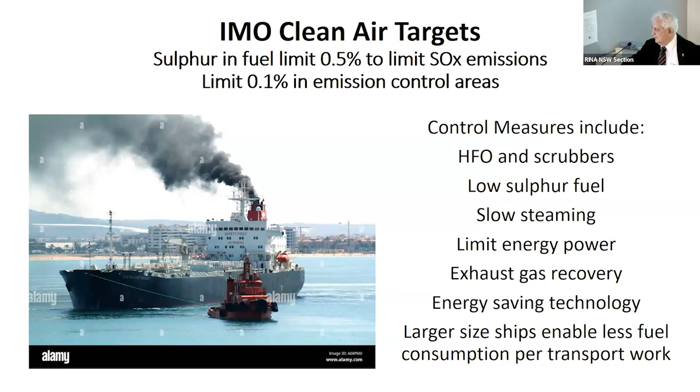They're looking at hydrogen power and clean air. That's been in for a few years, and here we are with the greenhouse strategy. IMO, following the Paris Treaty, 1.5 degrees compared to pre-industrial levels. The clean energy IMO carbon intensity is to reduce carbon by 40% by 2030, 70% by 2050 compared to 2008.

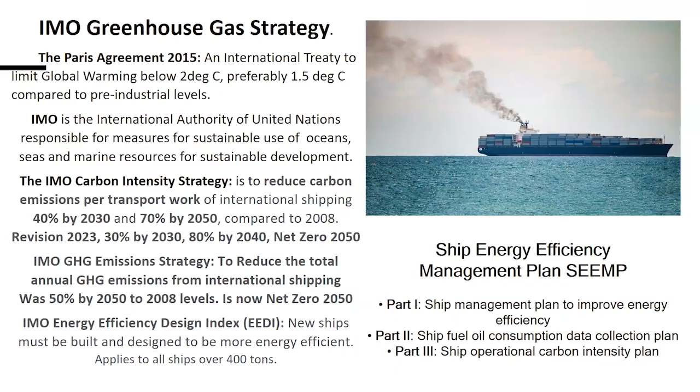And the revision this year, only this month or last month, 30% by 2030, 80% by 2040, and 0 at 2050. That's put a lot of pressure on the industry. So then new ships need to have a design index and an energy efficiency plan and a measurement plan. That's the diagram. It shows fuel oil collection system, CO2 intensity indicator, and then the operational carbon intensity plan, which has to be certified by a surveyor

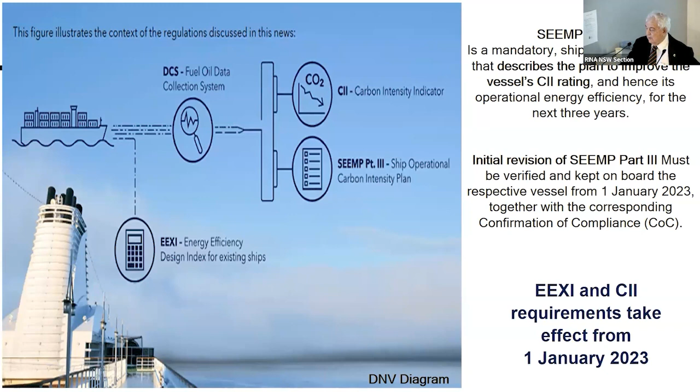and submitted to IMO, and the ships will get a rating next year from A to E. A is the best, E is the worst, and they'll have to put plans in to make sure they meet the next target within 3 years. So there we go. In terms of ships over 5,000 gross tons, CO2 per deadweight ton for bulk ships, per passenger for cruise ships, passenger ships, and per container for container ships. So there's a control center, one of the ship management companies in India.

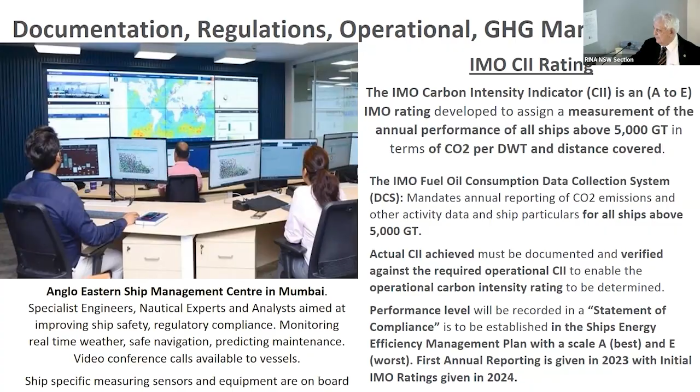And we get on to the energy saving devices here. We can see hydrodynamic is a big measure that ships can save energy. That's the hull, propeller, and appendages. And there we see on the left a kite, which is becoming popular with slow ships. But that looks a bit fast to me, but still flying a kite. That is fuel savings. Every energy efficiency measure means fuel savings and less emissions.

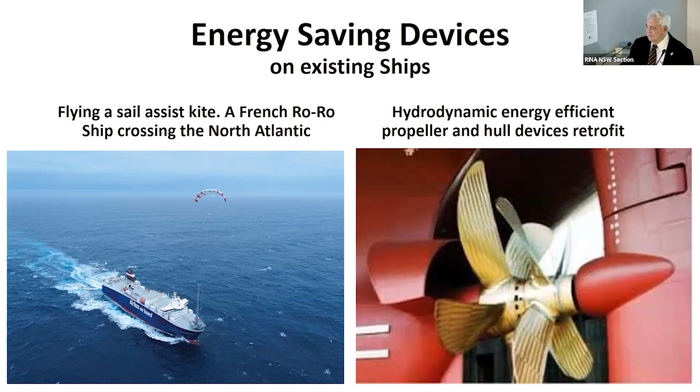So energy efficiency is the number one fuel, if you like, as described by the International Energy Agency. The first fuel is energy efficiency. And the best energy efficiency is obtained if something is turned off, because it's not using any. So when I go around and look at plants and equipment, if I see lights or something running that shouldn't be running and doesn't need to be running, well, why not turn it off? Or if it needs to be on standby, maybe just have it on standby. Set it up to consume less energy. So these are simple things.

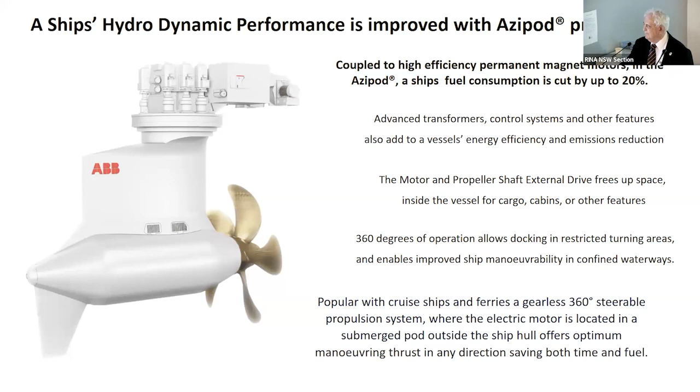Here we see a ship's Azipod used, very popular on cruise ships and ferries because of its maneuverability. They can turn the ships without tugs. It can steer and propel a ship, and the power plant is underwater, so it's electric propulsion. Save up to 20%. There's a new P&O ferry, and there it has Azipods and many other features.

There we go. They've got a power management system to close down parts of the ship not in use, particularly the car decks and cargo places that are not being used. And they'll be set back to emergency or standby conditions, so that they're available if they're needed. But generally, they're turned off when they're not needed, which is a good energy saving measure.

Batteries to replace engines when they're in port. They can plug into shore power when it's available. And this one is available at Dover. So that's, and Calais, or other major ports in the world, Rotterdam, and many of the major ports now have green power. But green power or any power is better than fuel for energy saving.

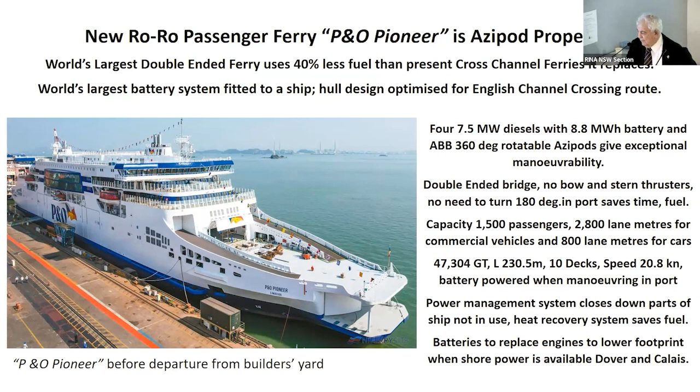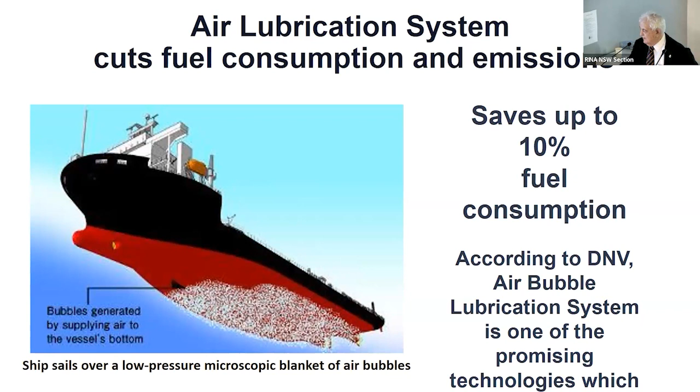And when the wind blows across the ship, it propels. The rotors are turning with low power, low voltage power. And when the wind blows across, it gets a force forward, which propels the ship and assists the engines. And so that's a very good energy saving measure. And it can be 5 to 25%, depending on the wind and the angle of the wind.

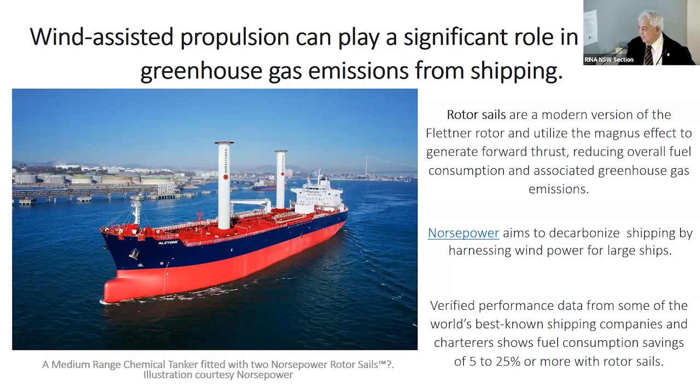And when the captain plots his course, he's watching where the weather is and where the wind is, so he can go a few more miles to save more fuel. There's one SC connector. There, the rotor sails are bent back there. They can be put up and down to go under bridges and low-hanging power lines in the various ports the ship goes to.

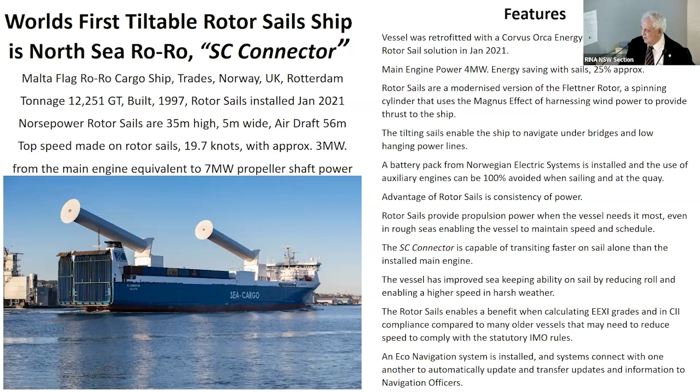So top speed on rotor sails is 19.7 knots. And under certain conditions, they can run completely on sails. And other times, just wind assist, or they can leave them down if they want to. There we have another big one. That's 74,000 tons with the rotor sails. It's the world's largest short sea ro-ro MV Delphine. It operates around Europe from Spain to Sweden and Ireland.

It can take any kind of cargo, containers, cars, people, or I'm not sure about people. I think it's a cargo ship. I'm not sure about people on that one. Anyway, it's very effective, very energy efficient.

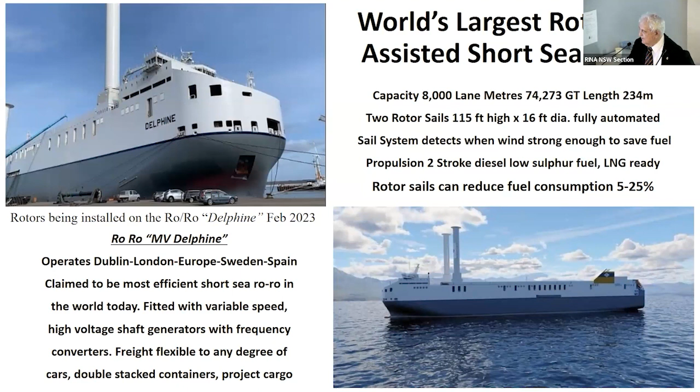There's another sail ship. I can't see the name right now. But that's another one that's tier 3. It's LNG propulsion as well.

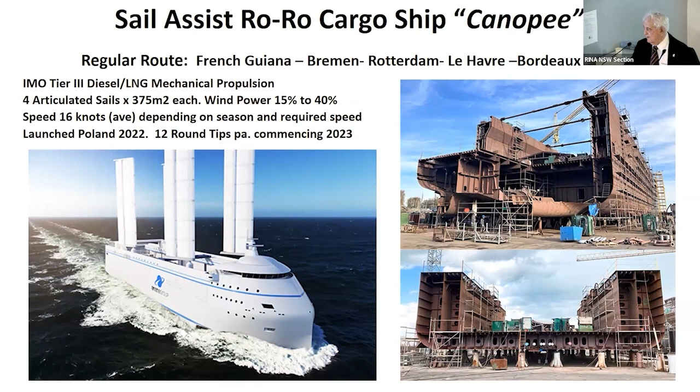Now, the seafarers were badly damaged psychologically during the COVID period when they couldn't get ashore very easily. They needed vaccination. Some were kept on board for over a year or longer. And the suicide rate among seafarers during that period was very high, as much as 4 to 1 compared to people on land. So they were very stressed, and they haven't really got over that yet. And now they're facing another big challenge to cope with the new technology. So they like the sails, but they're not so keen on the new gases that are coming in.

Here we see the Corona Utility. It's a coal carrier, runs out of Newcastle, Australia, to Japan, and you can see there it's got carbon capture, LNG with carbon capture, and sea kite assist. 50% reduction in CO2 by 2030. IMO's targeting 40%.

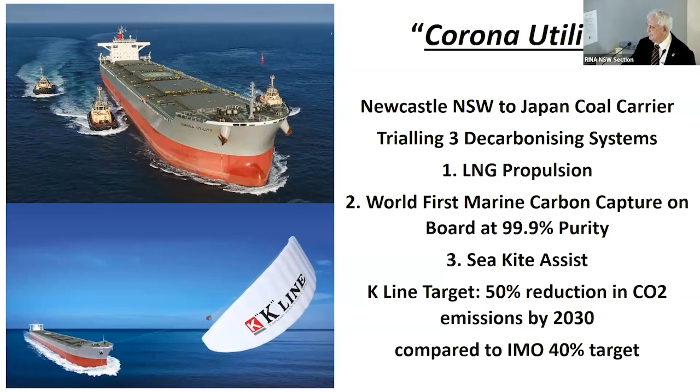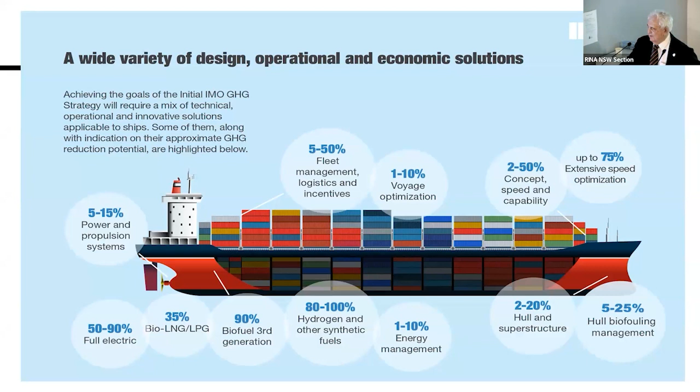That's an IMO diagram giving various measures that can be made in the economical solutions. Now here's another one using solar panels. This is a ship, the Emerald Ace. It's a regular caller at Australia. The batteries are inside, but the solar power is on top.

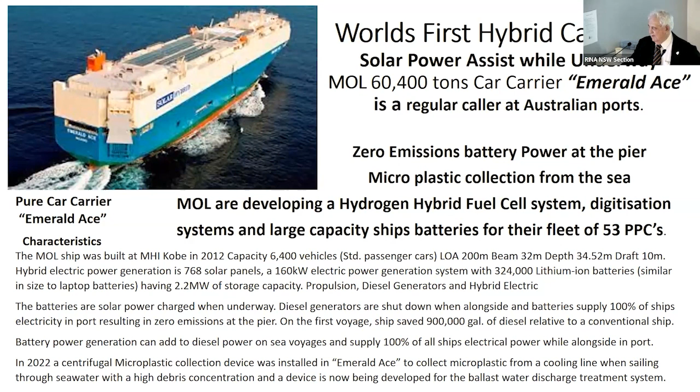And it's got a hybrid fuel system, digitization systems, large capacity batteries, and they don't need any shore power in port. They save enough energy from the sea to use for all the in-port requirements, and they can also use them at sea to reduce power on the main engines. So that's very economical. So the industry, different owners, are looking at different ship types, looking at different technologies. There's a whole range of technologies. And there she is, the Emerald Ace.

They lengthened the ship by 30 meters, and they get more cargo, more capacity, more passengers without an increase of power. And that's another energy efficiency measure, is to lengthen the ship. So there's so many different ways that things can be improved at sea.

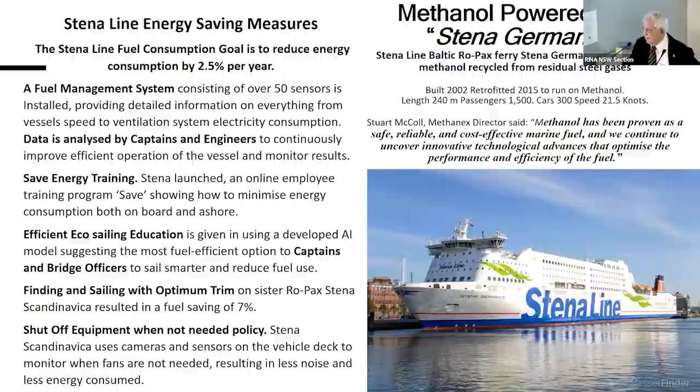The training on board, the best way, according to DNV, and I agree, is to first train the senior officers, like the captain, the chief officer, the chief engineer and second engineer. Train the first officers fully first, and then gradually work down the line and have onboard training, assisted by videos, films, and of course training ashore. Training in the universities and colleges is very important to know all the basics, and things that could go wrong with a ship.

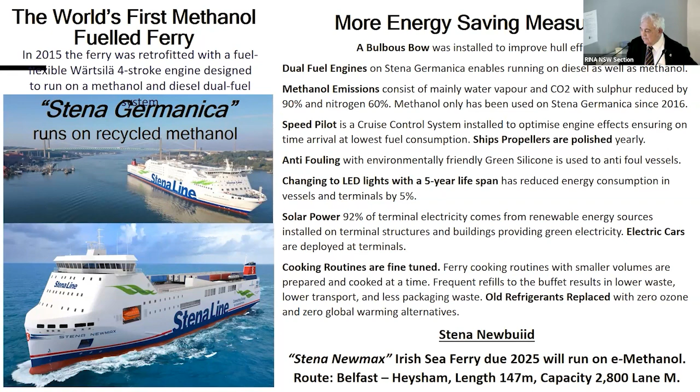In the airline industry, they train pilots in things that could go wrong, and they have plans. If they lose an engine, or a wing part or whatever goes wrong, they've got a plan to deal with it, and that's what we need in the marine industry for the new technologies.

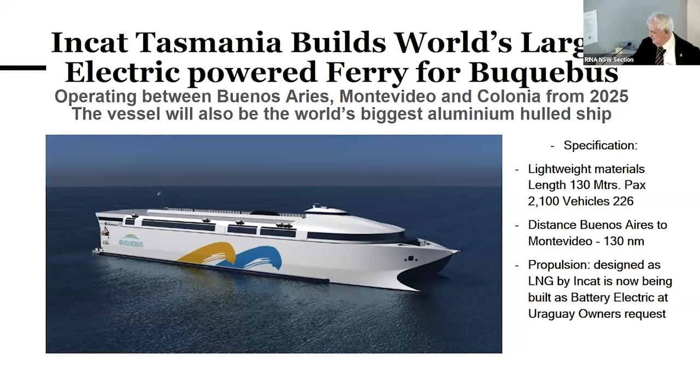There's another one built. It's another Australian build, a 35-knot passenger ferry for the Sweden to Gotland Island service. So this is an area where Australia has excelled in shipbuilding, these aluminium catamarans and ferries. And that's another example. 1,900 passengers, 600 cars.

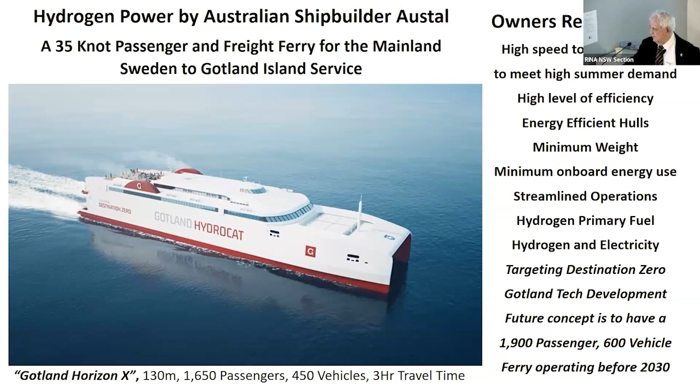And there's another, the first LNG ferry for Canada, the Vancouver area, the Salish Heron. And that's one of the biggest ferry companies in the world. There's the artist. What he's done is designed the hull with birds, the Salish heron, the bird in the local area of Vancouver, and there he is.

And that's something that gives the native people of the area something to be proud of, and also promotes the aquaculture around the area, and it's of interest to everybody. Maynard Johnny depicts the long neck, wing, tail, feathers and talon of the great blue heron found at Salish, British Columbia.

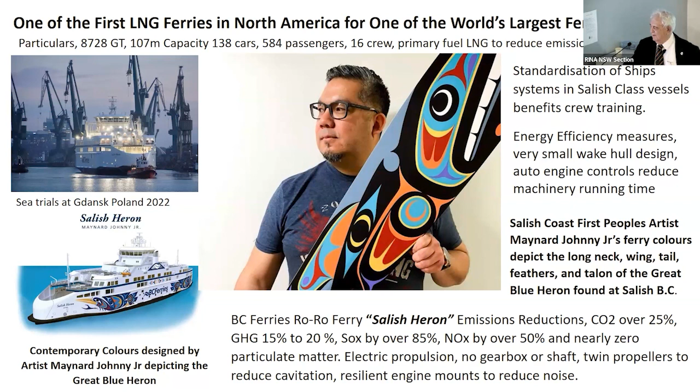There's the first fully electric tug for the Auckland ports, the Sparky, named after the electrician at sea. An electrician is commonly known as a Sparky, and they can do two departures of a large ship with fast charging between. They've got azimuth thrusters and Tier 3 generators. They can do transit voyages from port to port on diesel, but most of the time they're fully electric. The owners estimate the operating cost of the electric tug is 1/3 of a diesel tug. And it has cloud-based optimizing systems.

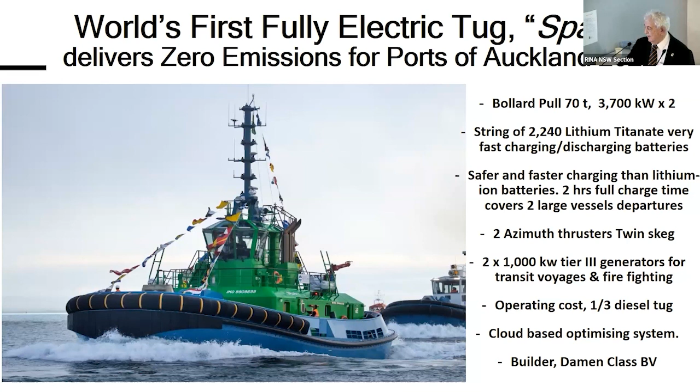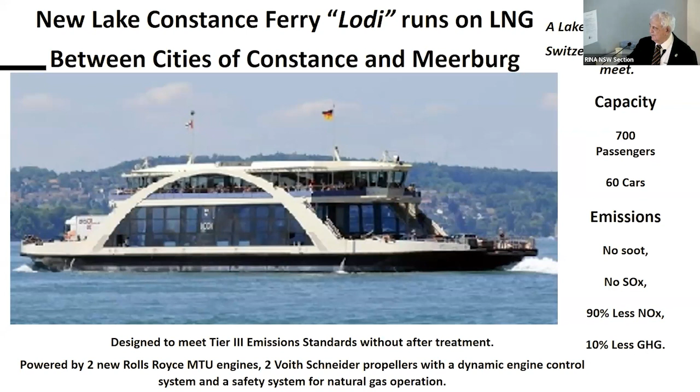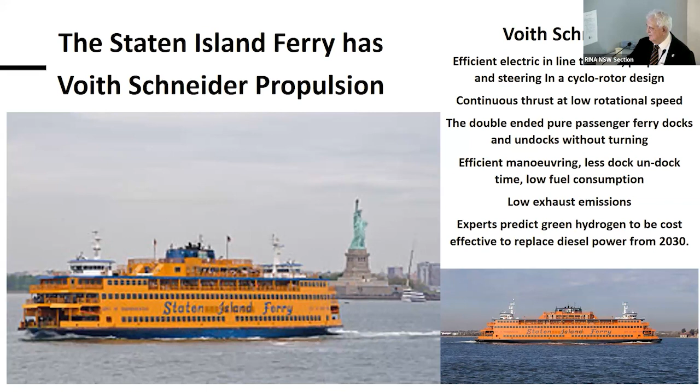There's another example with Rolls-Royce, Voith Schneider propellers, dynamic engine control and safety systems. It's an inland ferry between Switzerland and Austria. There's another one in New York, the famous Staten Island ferry, that's double-ended. It doesn't have to turn, and that saves power, of course, and it's got the Voith Schneider propellers again. So efficient maneuvering, less time to dock and undock.

Everything counts. Methanol's winning over hydrogen and ammonia for now, but methanol has a few problems. Ammonia is highly toxic, and these are issues that seafarers are afraid about. But what we found is when they're trained, they know what to do, how to play safe, and what to check. Once they understand it, the fear goes away. They're comfortable, and that's what's happened.

LNG carriers out of Australia, I'm told by a Lloyd's surveyor, have the lowest accident rate of any kind of ship, and that's because I believe the crew are so well trained and understand the system. So training is a vital part of seafaring. Seafarers are the people who operate the ships. If they don't know what they're doing, you can have more accidents.

And the recent report I read from DNV is that there are now 55% more accidents in machinery failures with new technology than what they had before. So there's obviously a learning curve with the new technology, but there needs to be a learning curve for the seafarers as well, in parallel with the technology, if they're upfront operating it. This is something I'm very passionate about, that they should not be neglected the way they have been.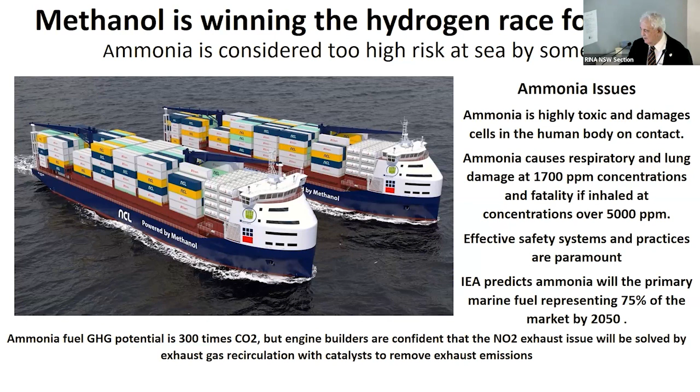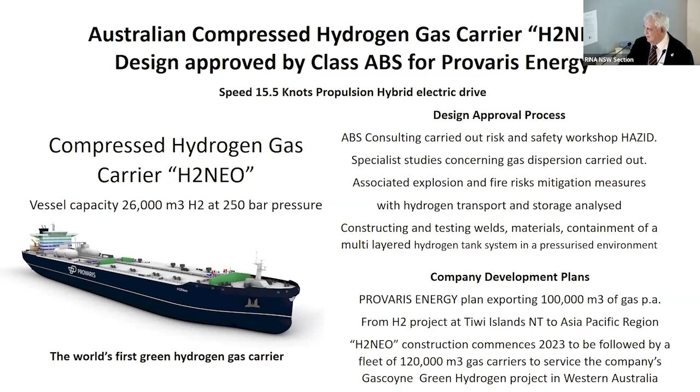So there we are now. There's another hydrogen carrier. This is Australian compressed hydrogen. You can carry hydrogen compressed as a gas or as a liquid. But as a liquid, it's minus 253 degrees centigrade, which is cryogenic and very expensive to keep liquefied. If you carry it as gas, it's cheaper. And there is a big gas carrier, 26,000 cubic meters at 250 bar pressure. It's designed, not built yet, for Provaris Energy. And after that, there's a bigger one to service the needs of Singapore and the Asian market.

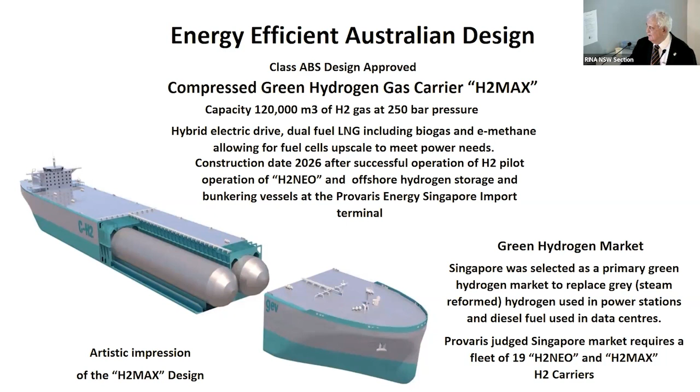So Australia is becoming one of the world's major producers of hydrogen, and that's been ABS approved for compressed green hydrogen. It's 120,000 cubic meters of hydrogen gas. It's hybrid electric drive, dual fuel, LNG, biogas and e-methane, allowing fuel cells to upscale to meet power needs. Now fuel cells are another thing seafarers are afraid of. They don't understand electrolyzers and fuel cells. Not all seafarers, but the majority. It's a green hydrogen market, so for Australia, the future is coming.

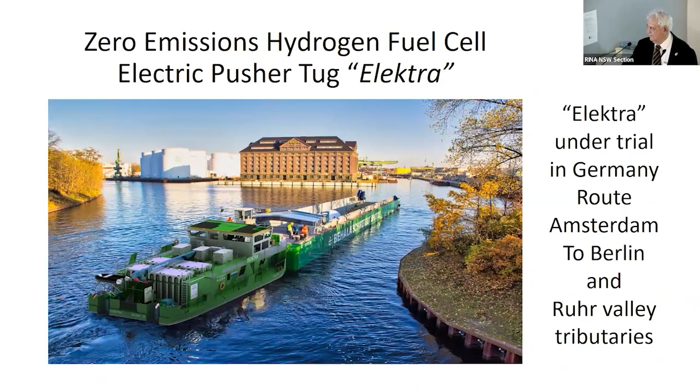So we've got sail assists, mechanical solutions like heat recovery, efficient insulation. Everything that can be improved with efficiency is being looked at on ships, as long as it's cost-effective. If it's too expensive, owners obviously look at the cost of implementing the new energy against the benefit. So the cost benefit is very important.

And there's Maersk. They've got methanol ships on order, and they've got their first ship delivered now, and it's on its maiden voyage, or might have even completed it by now, between Korea and Europe. And on the waypoints, they've had energy bunkering along the way.

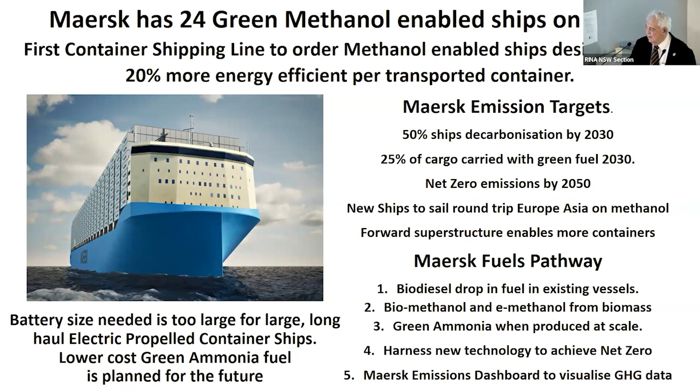Because methanol and all the gas fuels occupy more space. The space that was occupied by diesel and heavy fuels, now much more space is needed, up to 4 times for hydrogen, about 2.6 for methanol, I think it is. And so that's a big issue. And there's an ammonia bunkering ship being planned, a conceptual study.

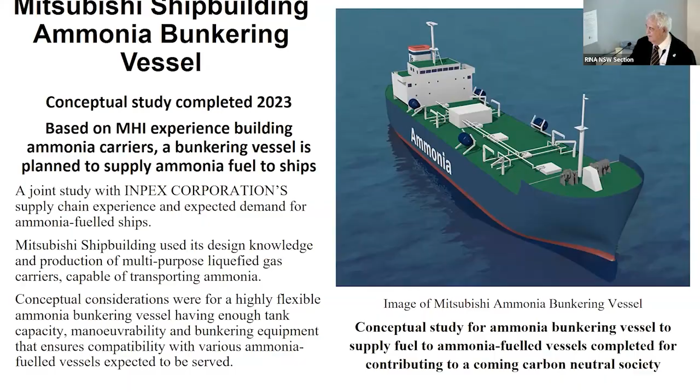There's ammonia dual fuel. She's ammonia ready and waiting for the ammonia. And there's another ammonia ship there, which is being built by Mitsubishi Heavy Industries in Japan. So there we've got 2-stroke engines, dual fuel. With the dual fuel, they can have one fuel and another fuel, or ammonia.

The characteristics of ammonia: it needs a pilot fuel to get it started, and it's safer than hydrogen, of course. Hydrogen is explosive at any temperature, but ammonia is safer, but not completely safe, and very toxic, and that's a big concern. But it can be overcome with training. Seafarers, once they're trained, they know what to do, and onboard training is very important, as well as institutional training, videos, manuals, and so on.

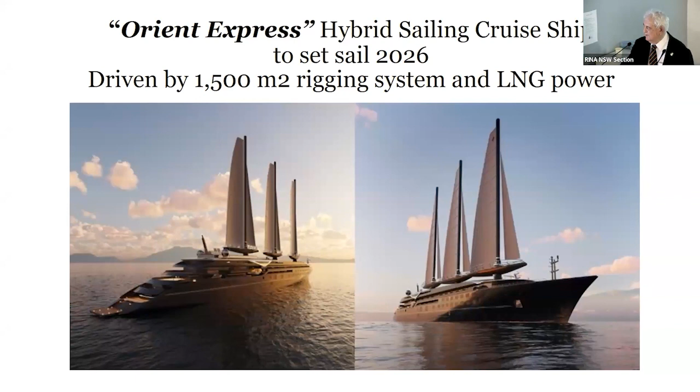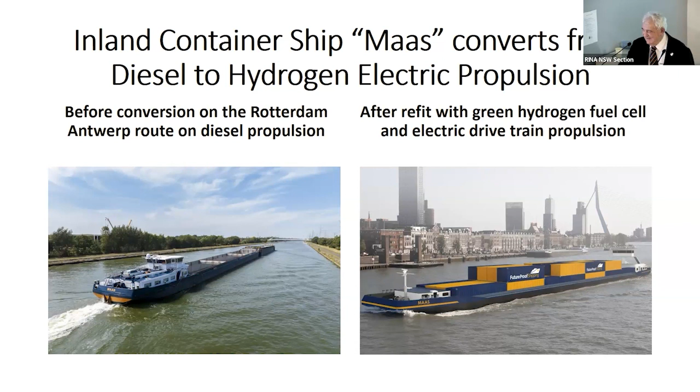Major problem is we haven't got the infrastructure, the bunkering facilities around the world for the ammonia, hydrogen. So what Maersk have done, they've focused on methanol, which is available generally, and by reading all of the articles, one by one, they've got suppliers at the various points. So they've got these methanol ships. So that will encourage the infrastructure to get built, because now there's a market for the infrastructure. So what comes first, the market or the product? I think it's a chicken and egg situation in the vernacular.

So there's a hydrogen fuel cell gas electric ferry for San Francisco Bay. She's built in Portland, Oregon, not Portland, Bellingham. What's the name? Anyway, Bellingham, up near the border.

Now, the reskilling of seafarers, all the reading I'm doing and what I'm hearing, it's very important. And seafarers want to be reskilled, or they're leaving the industry. A lot of seafarers left during and after COVID, never came back. Now, a lot of them are staying away because of the fears of the new technologies that they don't know much about, and also the pay and conditions are so poor that they can get better jobs ashore. So everybody concerned needs to seriously address this issue of seafarer training.

The unions in Australia, the Maritime Union, the Engineers Union, and the Seamen's Union, had a meeting recently to survey how many seafarers there were under training, and they found that only 1/3 of the seafarers under training could get training berths on the ships. So training berths have been cut out. So the commercial imperatives are put before common sense when it comes to seafarer training. So I think this is the most urgent problem to be addressed by all levels of authorities and anyone who can help. And so if only a third, what do the rest do? They go and get a job somewhere else.

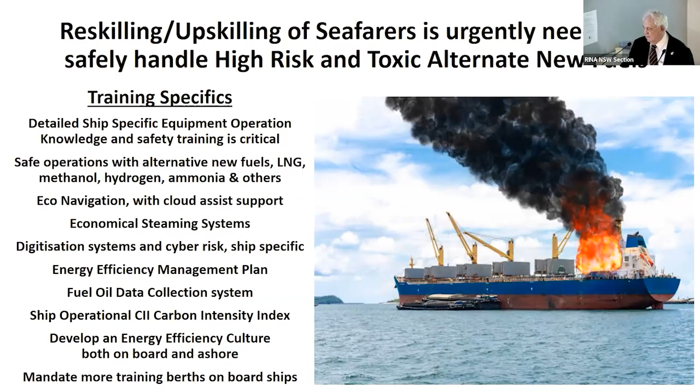There's Harmony of the Seas. Most of these ships have been built for energy efficiency. As a big passenger ship, the hotel load is about 35%, whereas on a cargo ship, it's probably about 5% for the crew services and non-propulsion. 35% is normal for a passenger ship. So energy efficiency in that section is equivalent to a hotel ashore. And we know a lot about energy efficient hotels, especially in Australia. There she is, Harmony of the Seas.

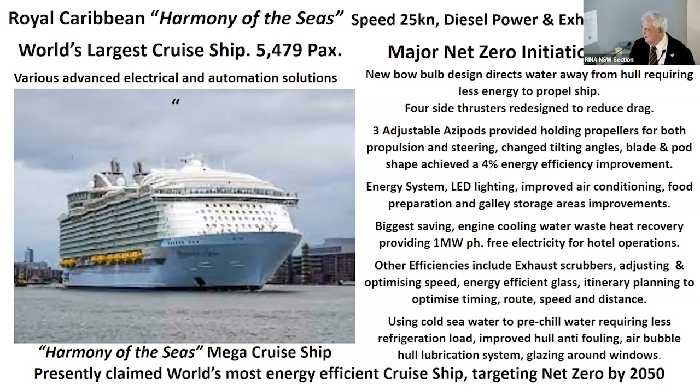There's a Disney ship. They've got bow thrusters. There's an Australian expedition ship. It's got the Ulstein bow. 12 knot service speed, cutting edge electrical systems. That's Australian owned, but it's running overseas.

Full carbon neutrality was achieved by adding carbon credit offsets from a wind farm after everything I did on the ship. Slow speed is one method. There was a rule of thumb when I was at sea, and I think it's general now: the fuel consumption varies as the cube of the speed. So the faster you go, the more fuel you use. As you slow down, you have a big reduction in fuel. And reports I've recently heard say that for a 10% drop in speed, there's a 27% drop in fuel consumption. So ships slowing down is one way to save energy.

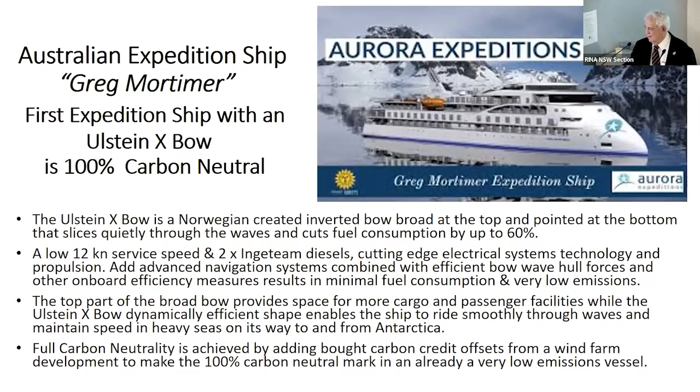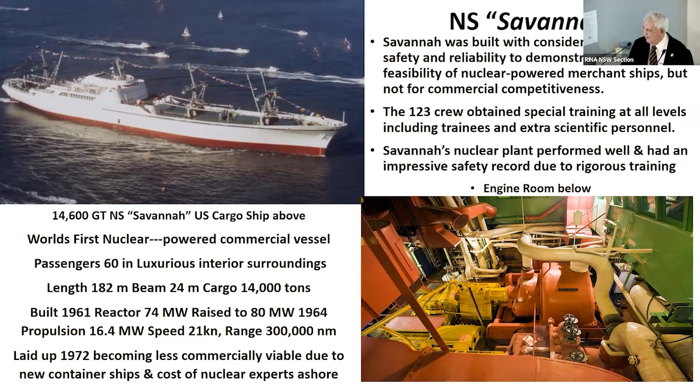And there's the Savannah. This is a nuclear ship that was built in 1961, and it was very successful and very safe. But eventually it went out of service because it was uncompetitive. They had to have 123 crew. They had to have nuclear specialists ashore. So it was uncompetitive, but nuclear is possibly a future fuel down the track, though it would be very expensive now. That's a submarine layout showing the nuclear part separate from the engine part.

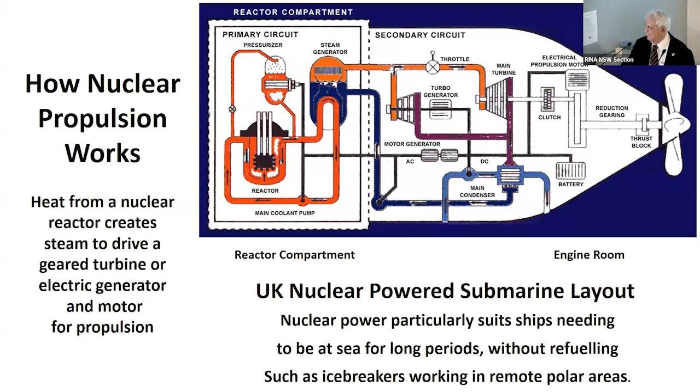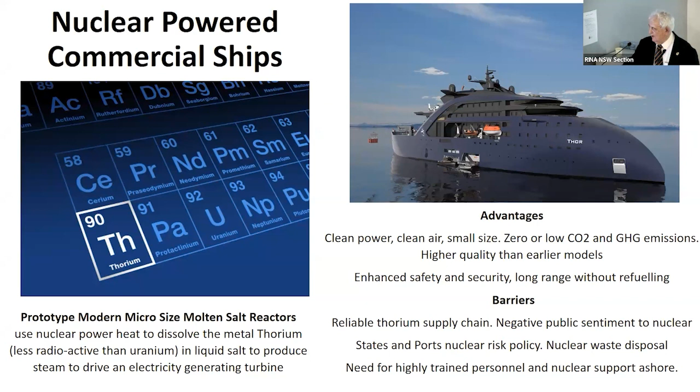With new ships, there's an example of a new one where they're using thorium, which is less radioactive than uranium, and clean power, small size. So that's an experimental ship, but there she is, the Thor, for thorium. But it's a prototype under trial, I could say. There's the two examples of nuclear power ships.

The US Navy has an excellent safety record, and it's been attributed to the high level of standardization and maintenance and the high quality of the Navy's training. Now, that's why I'm harking back to the training for the seafarers, so important. There's a Russian commercial icebreaker, so the technology is there when we're ready for it. It was used in the northern waters of Russia and refuels about once every 10 years. So the technology's there, the training's there.

Now we've got power station ships. South Africa has outages of about 12 hours a day, every day, somewhere in the South African network, complete outages. And South Africa is the most industrialized country in Africa, and they have power outages. So they brought this ship, but South Africa wouldn't agree to have it because they thought it was an environmental hazard to the ecosystem.

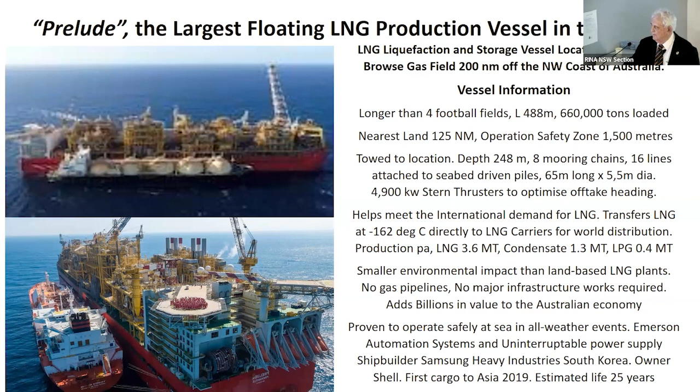So green fuels: hydrogen, ammonia, drop-in fuels, biodiesel. Biodiesel is a good drop-in fuel, but it's not a good long-term alternative because the amount needed for seafaring alone is huge. And some of the drop-in fuels are not suitable, they damage the engines. So if you're using green fuels, this kind of fuel, you should check with the engine makers and make sure that it's safe and proper to use. And also seafarers need to be trained.

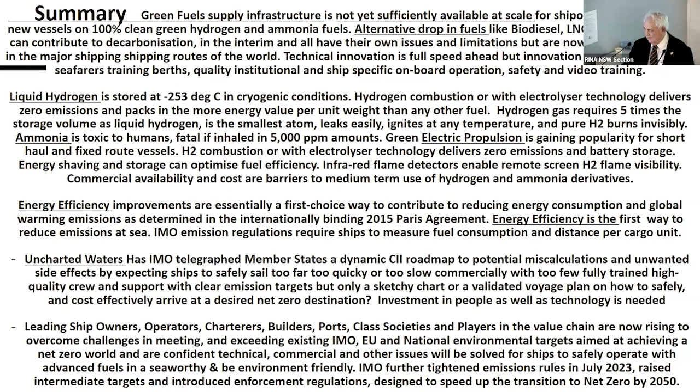So various energy efficiency improvements include dynamic design of ships. There's the naval architects' department: hull and assist appendages, propellers, wave making, windage, smooth polished hulls, air lubrication, sail assist technologies, eco-navigation, digital assist, AI assist, sea state, water temperature changes, weather, tides, current, trim.

All these things are being implemented gradually or quickly, depending on the different ship owners: energy storage, insulation, efficiency. And the culture on board is so important. We need team cultures on board. I've sailed on ships, and the happiest ships are the most productive ships and the safest ships to sail on, that from my own experience.

And so I would suggest to the industry to encourage efficiency and culture on board, work as a team, listen to feedback from seafarers because they see things, and act on what is worthwhile feedback. Electric power is a leading green option for limited distance, because the batteries for big long-haul ships would be too big. They take up too much space.

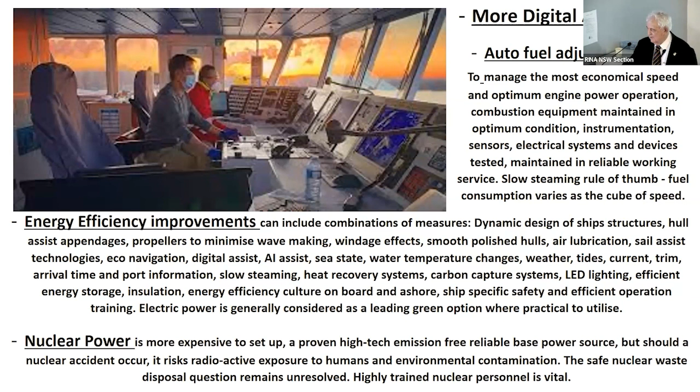Nuclear power, it's expensive and it's coming. And so there's my message. Move ahead with the new technology. It's here, it's coming. We need well-trained, competent, experienced seafarers supported by skilled land-based expertise. They're hard to replace. So all new entrants must have a pathway to a career in the industry. Otherwise, they won't be here, especially associated with the new fuels and use of digital technology.

So the valued personnel have the capacity to take charge when things go wrong, fix problems, save lives, property, and the environment. The investment in people is vital for success. Thank you.